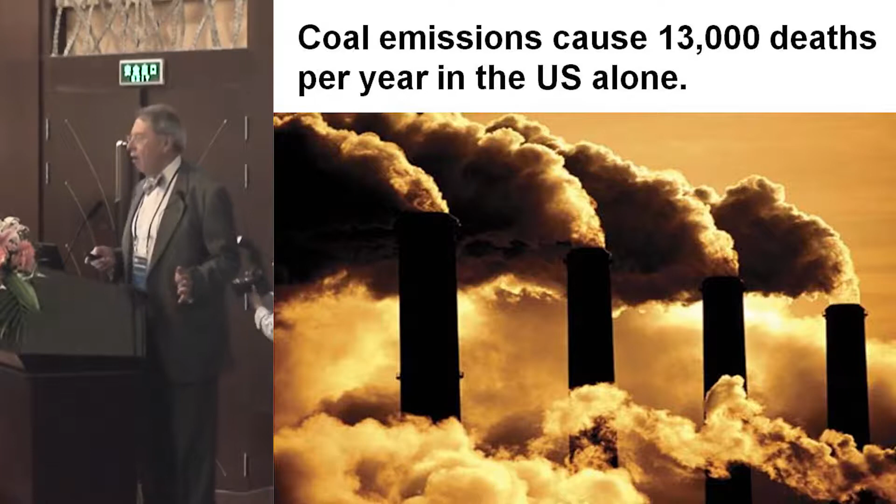In the long run, people always do what's in their own economic self-interest. First, let's start with coal. The US EPA says coal causes 13,000 deaths a year from respiratory disease caused by particulate inhalation of particles about 2.5 microns or less. That's in the US alone. In China, over 100,000. The UN estimates that worldwide, almost 1 million people die from coal particulate emissions.

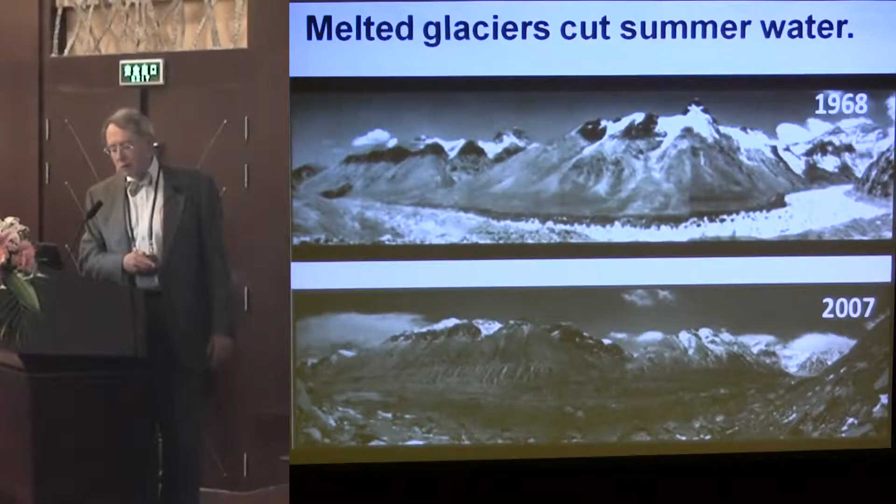One of the problems with global warming that I find the worst is the lack of food and water caused by the melting of glaciers. Glaciers normally retain water in winter and release it in summer, but the rivers fed by the Rongbuk Glacier are now becoming less able to provide water during the summer. Without water, growing food is next to impossible.

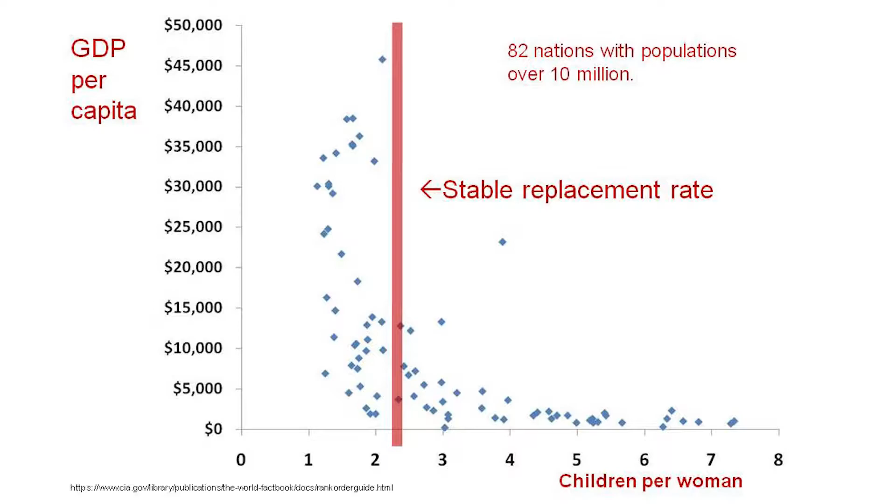Population scientists say about 2.3 children per woman leads to a stable population. If we draw that on the graph and look at it, it's the wealthier nations that have a stable or reducing population. The United States birth rate is about equal to that which would cause no growth. US population growth is principally by immigration.

Prosperity depends strongly on energy. Again, using CIA data, annual kilowatt hours per capita: the US is off the charts at about 12,000 per year. That's an average energy consumption rate for electricity in the US of almost 1,500 watts on average. Places in Africa have electric consumption of less than 100 watts per capita. It's pretty clear that somewhere around 2,000 kilowatt hours a year is the break-even point for achieving prosperity using electric power.

Now, electric power is not the only way to achieve prosperity. You need education, property rights, rule of law, medicine, and so on. But electric power is critical to prosperity because it's the type of energy necessary for cooling, for heating, for water purification, for sewage processing, for medicine, for communications, for industry, for transportation. All those things depend upon electric power.

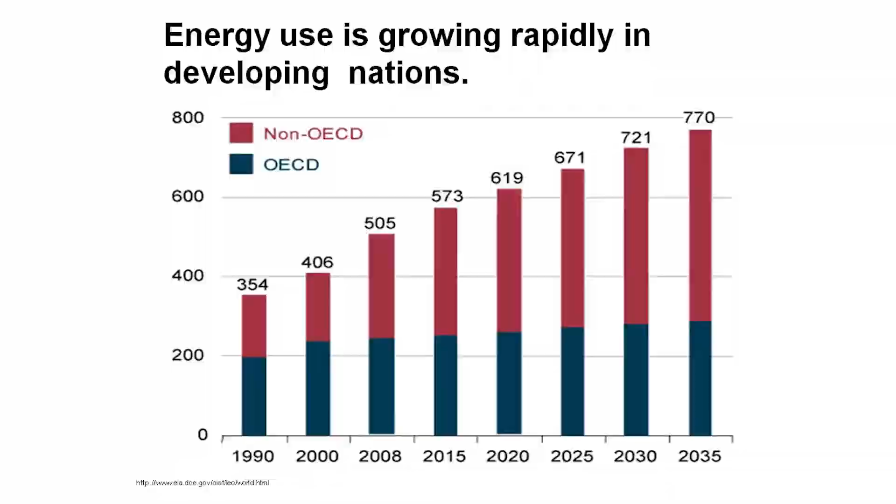All the developing nations know this. They wish to increase their energy use. And so you see, the non-OECD nations are projected to have the most growth in energy over the next few decades. How are they going to do it? They're going to do it by burning coal, because they don't have money to build $5 billion nuclear power plants. They will use the cheapest energy source available to them because they desperately need that electric power.

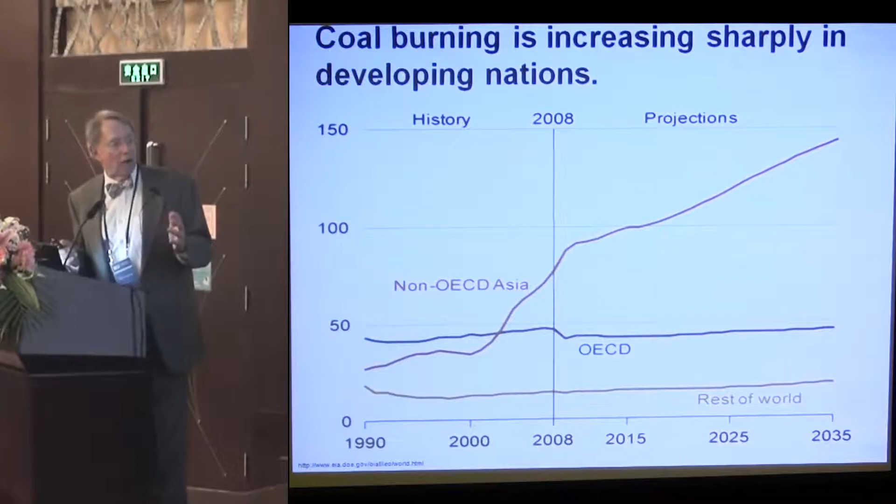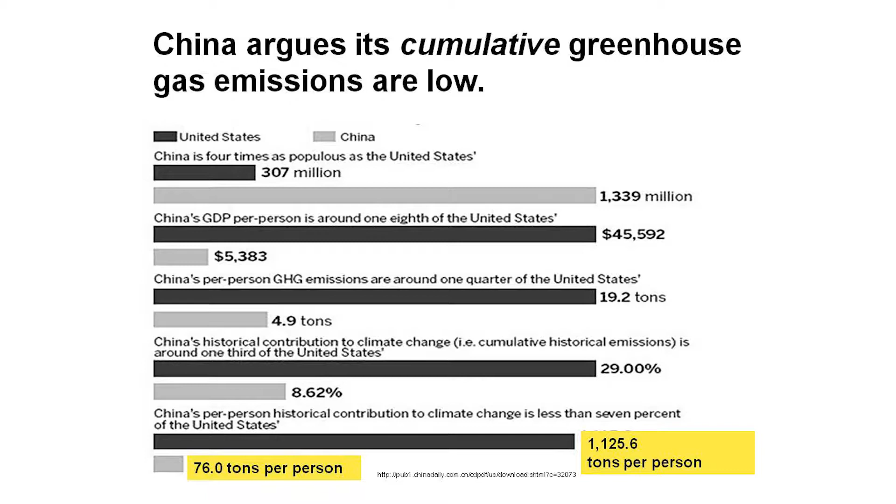The China Daily in 2010 published this article. Technology is required to solve this problem. They also argue against carbon taxes. Here's that same chart magnified. They point out that cumulatively in the US we are responsible for about 1,000 tons of CO2 per person, whereas in China it's less than 10% of that. The developing nations argue that the West gained its prosperity by cheap energy, by burning coal and emitting CO2, so why should developing nations be denied that right? It's not fair. I'm not trying to make that argument, I'm trying to point out that it's impossible to reach agreement on such a contention.

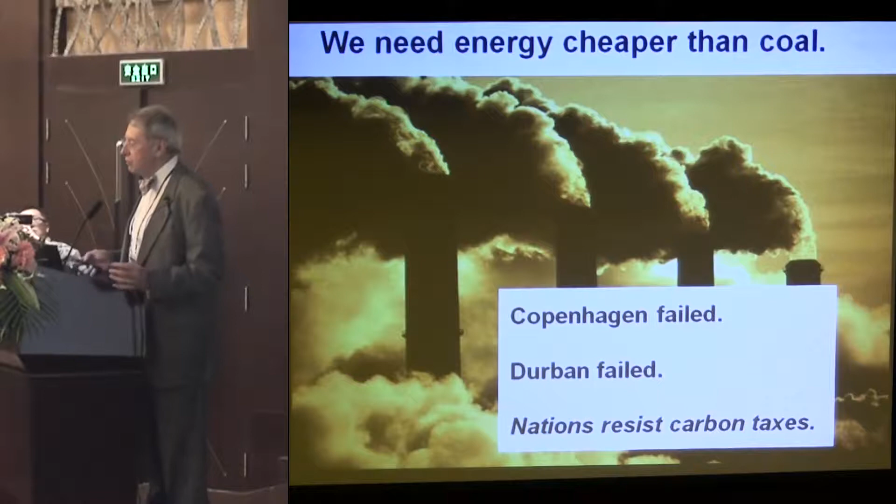So we tried anyhow. We had conferences in Kyoto, in Copenhagen, in Durban. Do you know 30,000 people went to the conference in Durban to negotiate a climate treaty? Well, how can 30,000 people agree on anything? How can 7 billion people in 250 nations in the world agree to impose taxes on carbon that is against their individual economic self-interests on behalf of the whole world's stability? It's not going to happen.

So let's look at the cost of electricity from coal and other sources, because there's also a green movement that wants to replace coal. Here's the cost of coal: about $2.8 per watt of generation capacity is the capital cost. In this talk, I use a single model throughout: capital cost recovery at an 8% cost of capital over 40 years, operating a plant 90% of the time, giving 2.8 cents per kilowatt hour. So it's easy to remember, $2.8, 2.8 cents.

So that's the capital cost. The fuel cost for coal is about $45 a ton delivered to the plant, which adds about 1.8 cents. So in this model, the cost of coal for a typical US plant is about 5.6 cents per kilowatt hour.

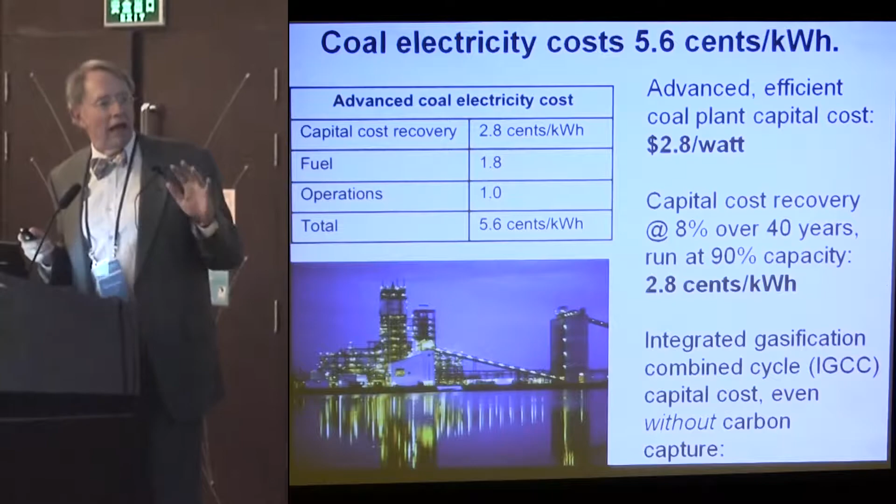Natural gas is another interesting energy source. First, if you were going to do the best job you could, you would use a combined cycle gas turbine, which has 60% efficiency converting thermal power to electrical power. Buying such a thing costs about $1 per watt for capital costs. I used fuel costs of $5 per million BTU to come up with a fuel cost per kilowatt hour of 2.8 cents. Our operations costs are standard in this model, and that comes to about 4.8 cents per kilowatt hour.

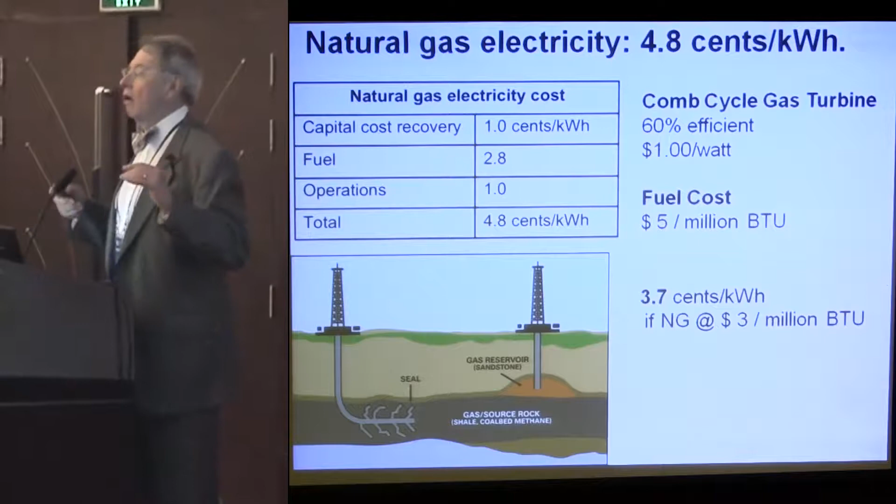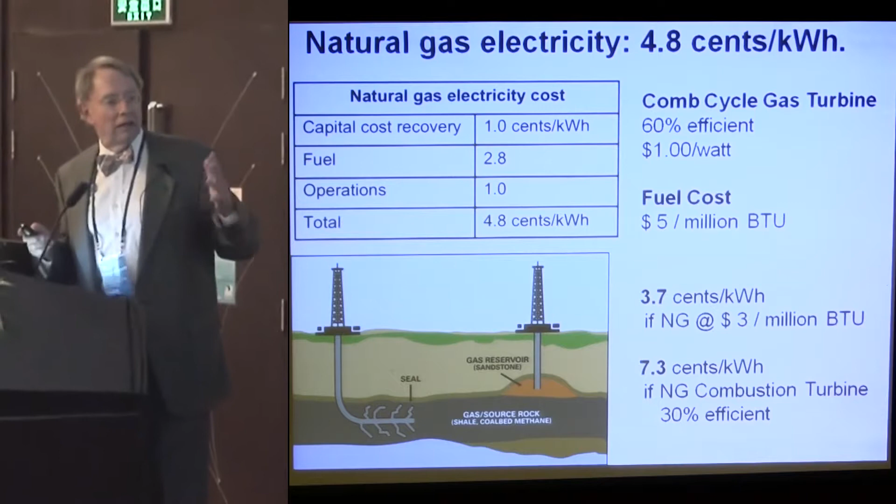Now, on the other hand, the cost of gas right today is a little lower than that, and if that were to persist forever, we could have a low cost of power from natural gas of only 3.7 cents. But actually, we don't use combined cycle gas turbines very much—we mostly use natural gas combustion turbines, and that would mean it would be about 7 cents. So those are the bogeys we want to deal with.

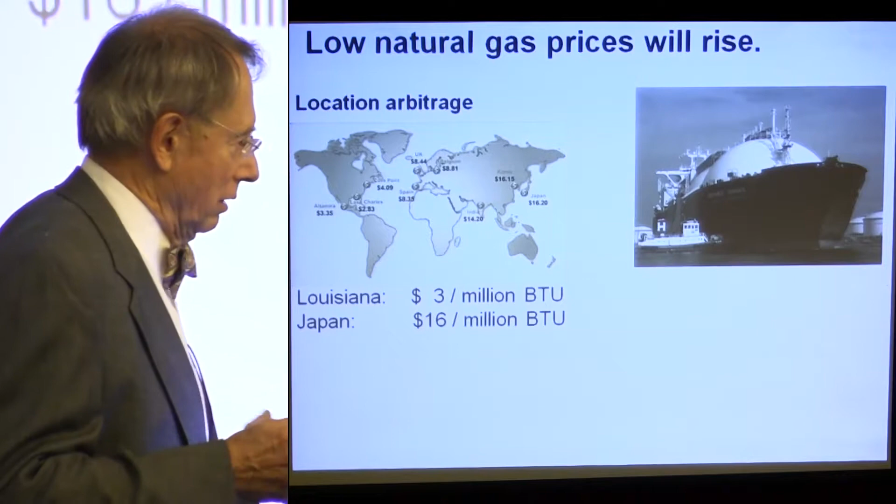Here are the reasons natural gas prices will rise. Here are the prices of natural gas worldwide: in Louisiana, about $3; in Japan, about $16. Japan is importing liquefied natural gas more and more because they've shut their nuclear power plants down, and it has changed their balance of trade from a positive number to a negative one. So that really can't persist for long periods of time.

Substitution: just look at the price per BTU of thermal energy from oil versus natural gas. There will be substitution, more emphasis on flex fuel vehicles. That's going to drive up demand for natural gas and raise the price. Even the Energy Information Administration of the United States says it's going to go up. That's why I used $5 in my model.

Let's look at wind. Wind is integrally tied with natural gas. This number is pretty high, isn't it? Well, the reason is that it costs a lot of money to build these wind farms. It's very hard to find the right costs.

The costs are generally hidden from the public, so the public doesn't know about the subsidies. But here are two examples: Deepwater Wind off the coast of Rhode Island, and Cape Wind off the coast of Cape Cod, Massachusetts.

These are the costs per watt. But those capital investments can only be recovered in the 30% of the time the wind is actually blowing, so the capital cost per kilowatt hour generated is much higher—it's 17.4 cents. The fuel cost is nicely zero. The ops cost, I made the same for all of this model.

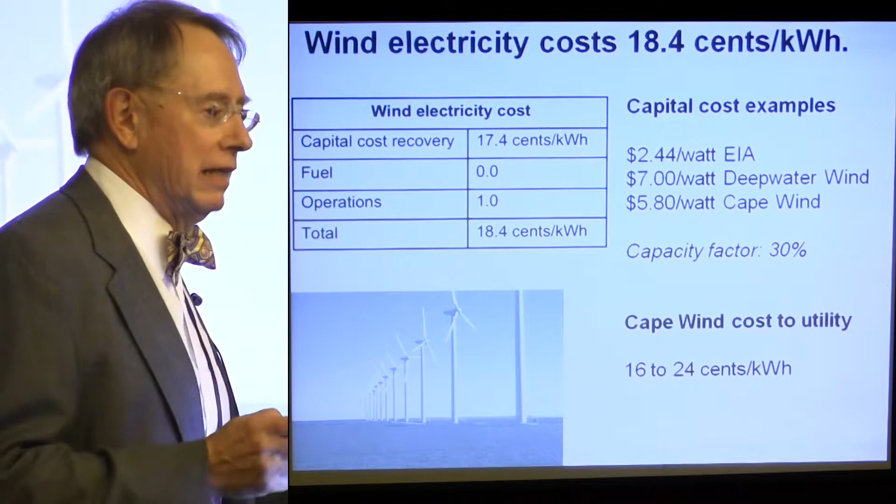I got 18.4 cents. I checked that against the real costs, and Cape Wind has negotiated a deal with the state of Massachusetts in which they will sell power at that price. So I say that model is about right—that's how much it really does cost, but they're going to hide that number from the ratepayers.

Now, wind turbines increase CO2 emissions. How can you say such a thing? Let me explain. First, if you had hydropower available, you could use it to back up wind turbines during the lulls. So if the wind turbine is running 30% of the time, the hydro could run 70% of the time. In most situations there isn't enough water to run hydro constantly, so you only open the floodgates when demand is high. If you had wind turbines coupled with hydro, you could in fact just save water, not emit more CO2. That's a good pairing—it's the kind done in Denmark with the hydro facilities in Scandinavia.

But I want to go back to the two kinds of natural gas turbines. The most common is a combustion turbine, much like a jet engine. It's only 29% efficient in converting thermal energy to electrical power, but it starts up quickly—in 10 minutes or under, approximately. So as the wind lulls, the natural gas combustion turbine fills in the gaps.

The most efficient gas turbine is combined cycle, with 60% efficiency—twice as good—but it takes a long time to start up, almost an hour, because not only does it burn gas, it also has to run the boiler with the output of the turbines. So it's a little more expensive, slow to start up, but a lot more efficient when running.

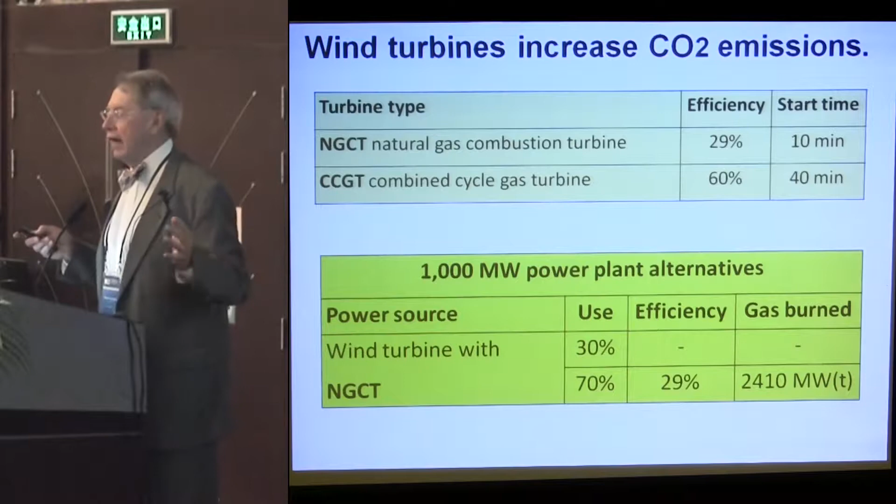So let's suppose we were planning the energy economy of a nation, and we have a choice to make. One choice is, for a 1,000 megawatt power plant, use wind turbines with natural gas backup. If we do that, then 30% of the time we're not using any fuel, but 70% of the time we're using fuel at a rate of 2,400 megawatts thermal.

Suppose instead I had only combined cycle gas turbines. Well, I'd be running 100% of the time at 60% efficiency, using less fuel. So I deplete my resource less rapidly, and I emit less CO2 by not having installed any windmills to begin with.

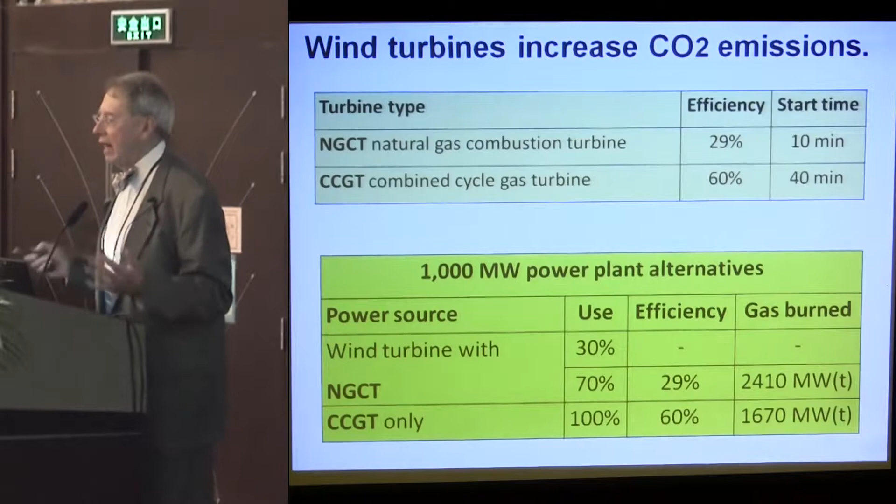The public isn't aware of them because they're hidden, averaged out over the whole bill. But what's important to society is not who pays—whether it's the taxpayer, the ratepayer, or an unlucky investor like the government of Spain. What matters to society is the true cost. So let's look at those, and that's why we're doing this.

Biomass. The cheapest way to use biomass is to burn it. We can talk about ethanol-powered engines and so on, but there's a lot of energy lost converting biomass to ethanol. So let's just burn it—that'll give us the best answer possible.

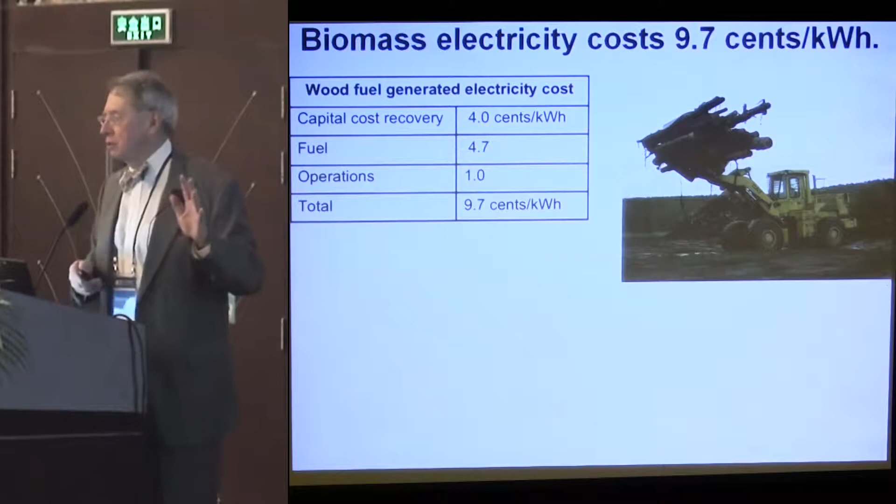Capital costs—I looked up a few plants. I used $4 per watt to build a wood chip burning power plant, and I actually visited one. Capital cost recovery comes to 4 cents per kilowatt hour. For fuel, you have to drive trucks around to the woods to cut lumber, haul it back to the plant, cut it into chips, and burn it.

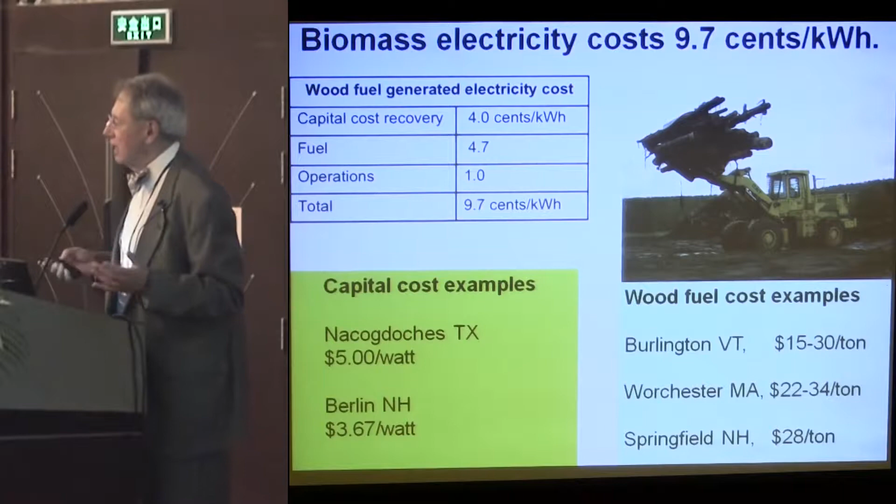And here are the typical costs. I convert those costs in tons to BTUs times the efficiency of the plant, about 4.7 cents per kilowatt hour. Now, you might say, how do wood plants actually make money if they're selling it so expensively? Well, there are all kinds of rules in the United States, at least, about getting green energy credits that

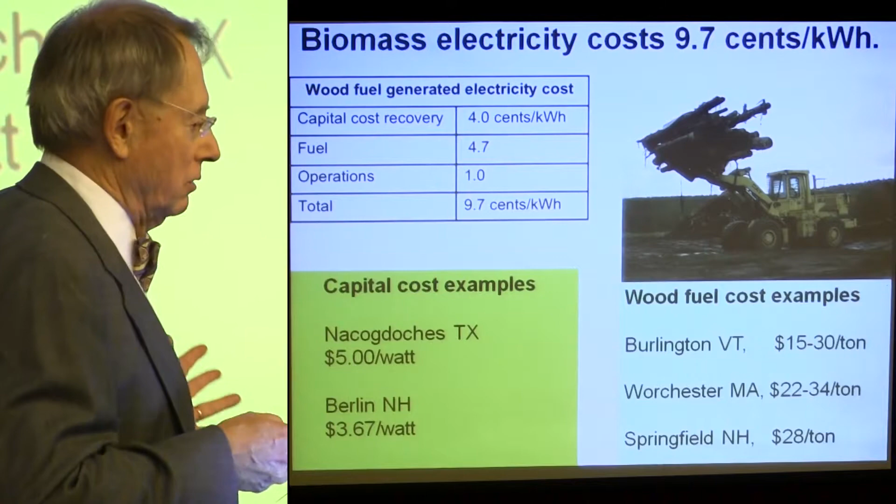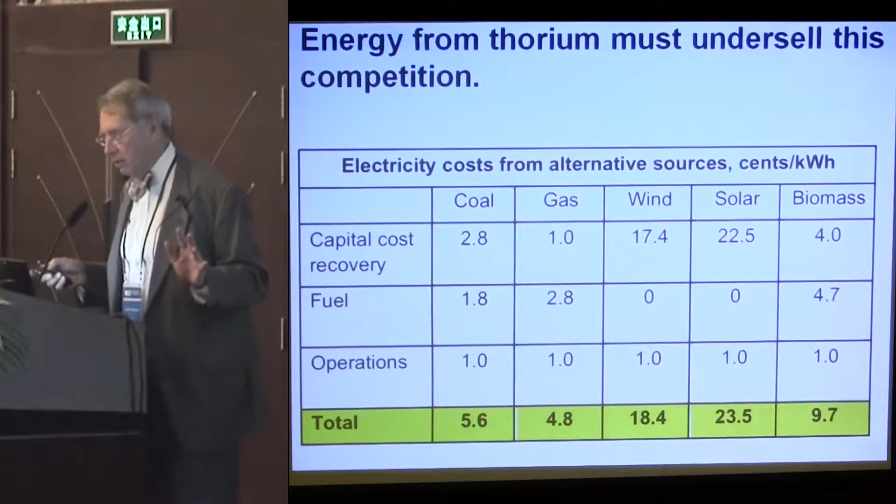are marketed, renewable energy credits, to make it possible to do that. So, if we want to save the world by underselling coal, here are the numbers we have to beat. And we might have to go as low as 4.8 cents for gas if, in fact, the gas prices never do rise. That's the bogey. That's our objective. Undersell those numbers.

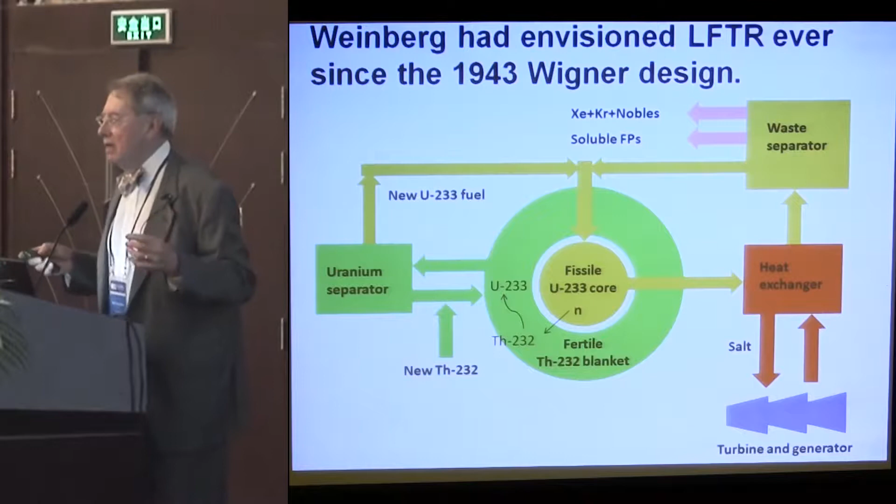Can we do it? Everyone in this room probably knows already how one of these liquid fluoride thorium reactors works. In this example, it's a two-fluid reactor that is fed simply by thorium, and it's sort of idealized, and it continuously processes the nobles, which are relatively easy to get out, and the fission products, which are harder to get out. Weinberg thought that the world's future depended upon such an inexpensive energy source.

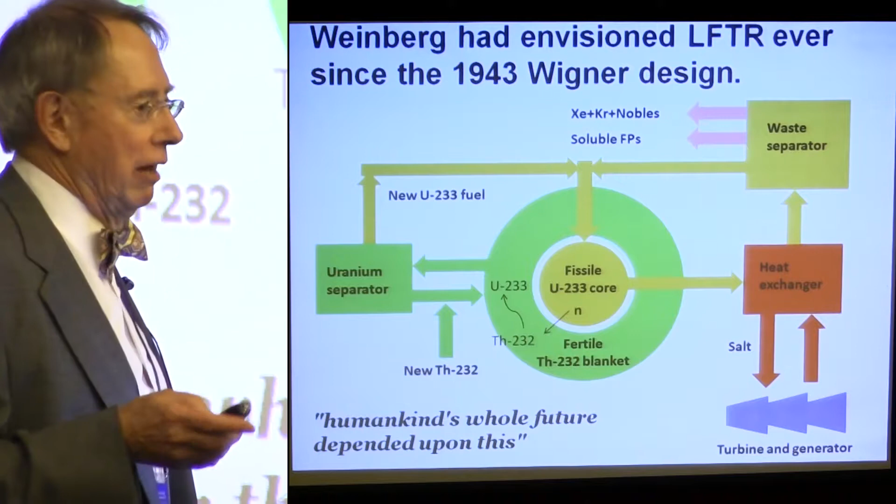Weinberg himself wrote about global warming from CO2. There's an intermediate step that could be equally effective, a lot less expensive, the denatured molten salt reactor that actually does not bother to process the dissolved fission product fluorides, but simply leaves them in the salt for 20 or 30 years until eventually they have to be reprocessed or perhaps just dumped and started all over again. In this example, it's fed with U-235, probably diluted in U-238 at a 20% level, and that works.

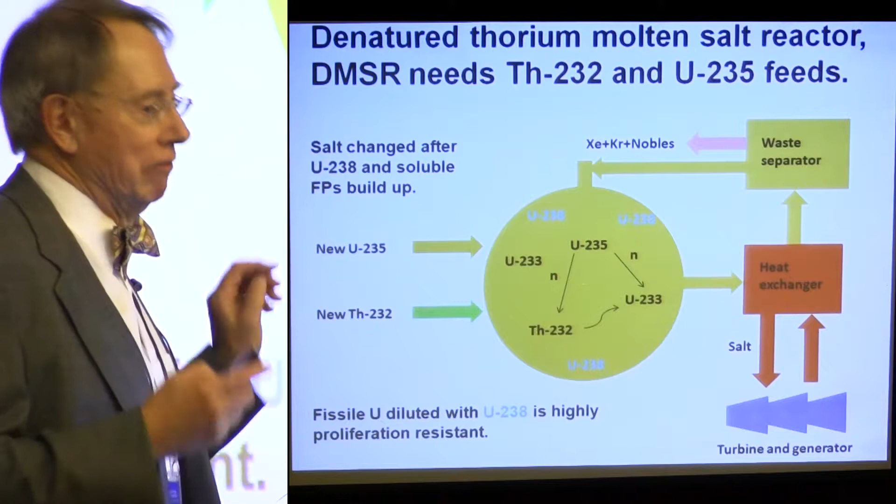Oak Ridge built one of these without the U-238. They ran it on U-235. They ran it on U-233. The advantage of U-238 is that this kind of reactor is probably the most proliferation-resistant reactor that you could scheme up.

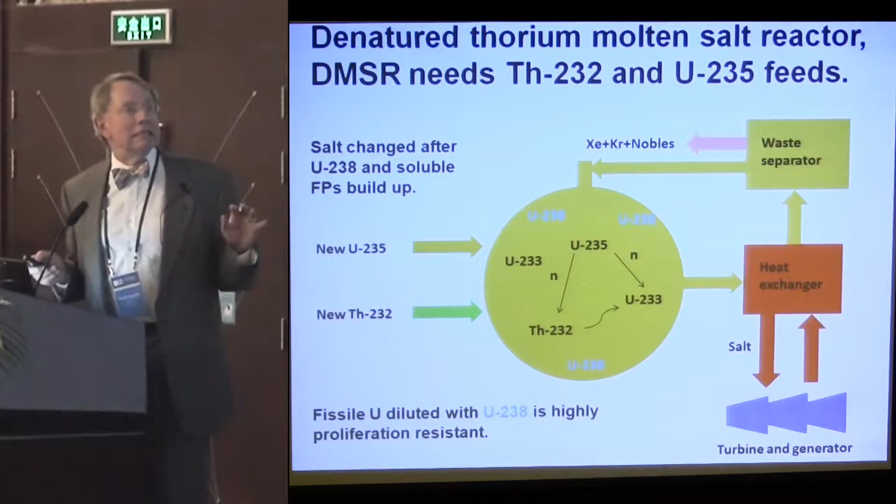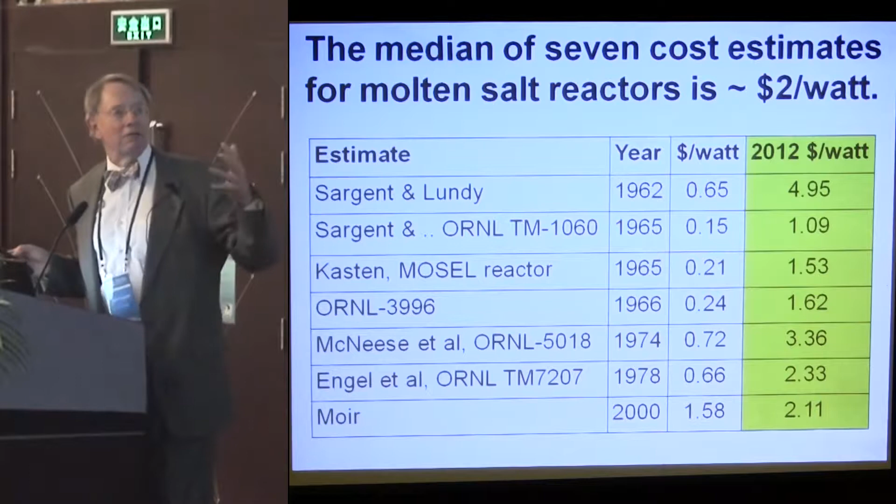Well, can thorium energy be cheaper than coal? That's what I want you to learn. The answer is, here are 7 proposals over the years to build molten salt reactors. And you can see $2 is a reasonable number for a target. These are real proposed numbers, inflated to current dollars.

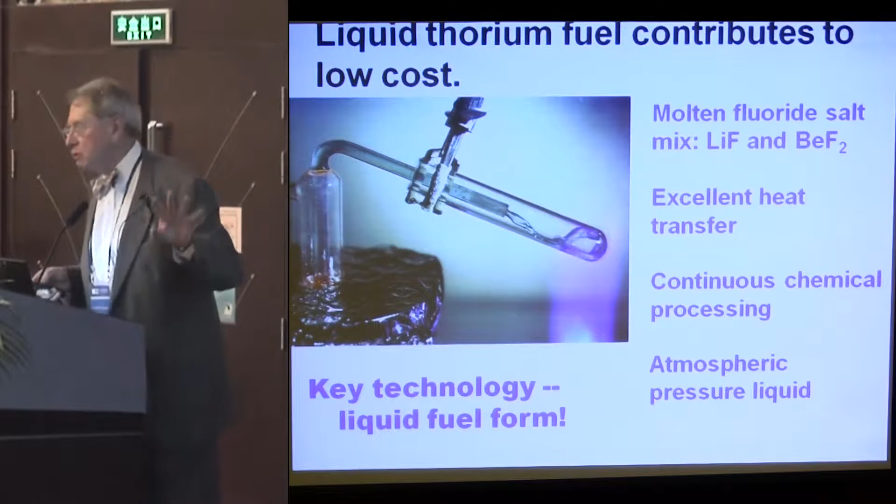The reason this technology is potentially inexpensive isn't the thorium so much, it's the liquid fuel form, because it has excellent heat transfer, allows continuous processing for fuel additions and fission product removals. It's an atmospheric pressure liquid, so containment is much simpler. And it's a room temperature solid, so if there's a problem, the particulates or the fission products and so on don't necessarily escape so easily into the environment.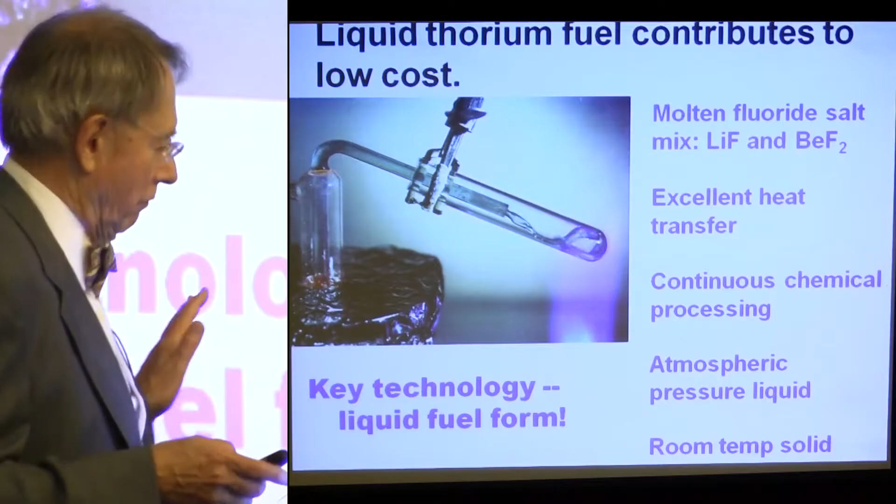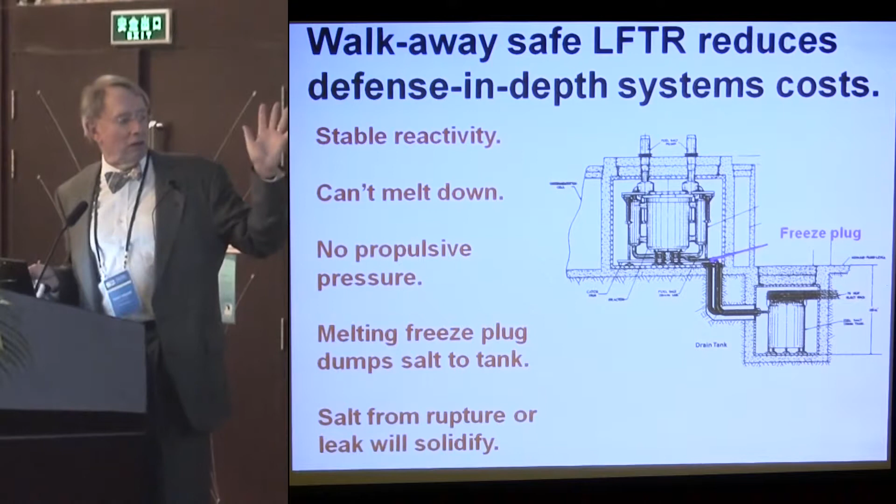The safety systems also contribute to the low cost. The reactivity is stable, makes it simple to control. It's a thermal reactor, unlike a fast reactor. There's no meltdown concept. It's as hot as it's going to get. There's no propulsive pressure to push reactive materials into the environment, and so on. There's no large containment dome. That saves money, saves mass.

Let's look at the waste product for a minute. Here's the process for converting Th-232 to U-233 by neutron absorption in a nuclear power plant, in particular a liquid fluoride thorium reactor. And if you were to let that go, eventually, by more and more neutron absorptions, you could actually get up to plutonium-239 and perhaps the higher level actinides. But compared to a normal light water reactor, it takes 6 more neutron absorptions, so it's much, much less probable to generate any of that long-lived, high-level transuranic waste.

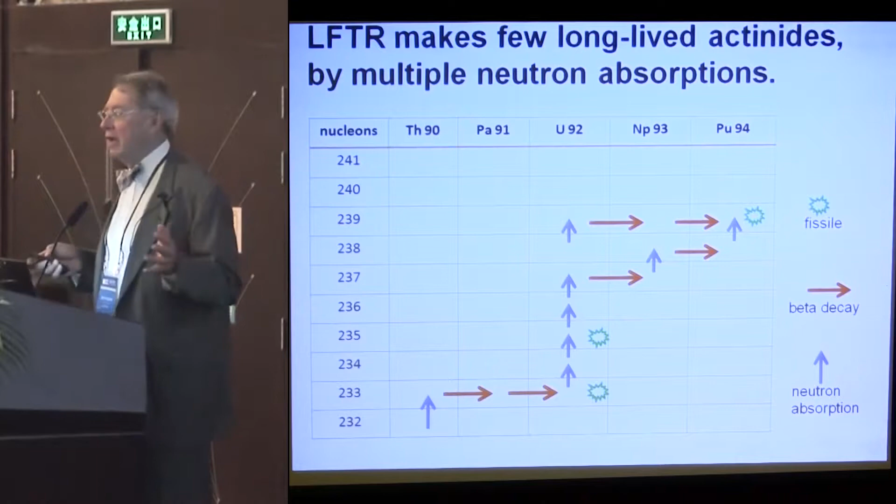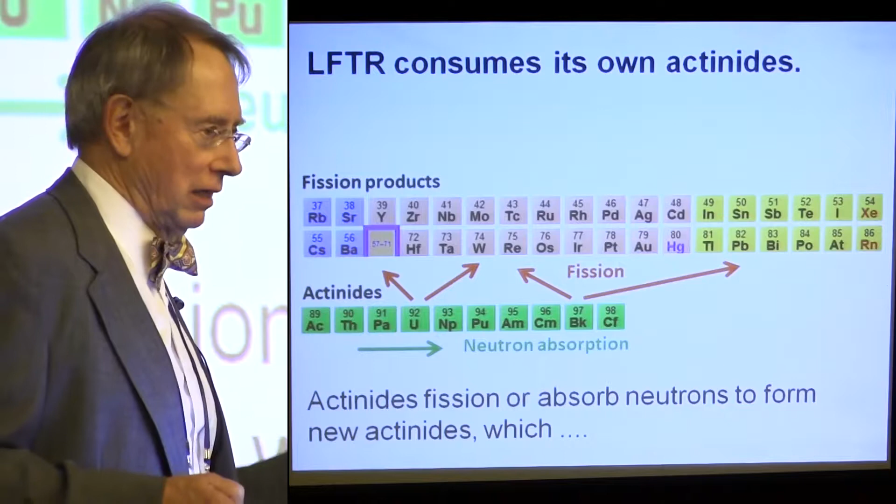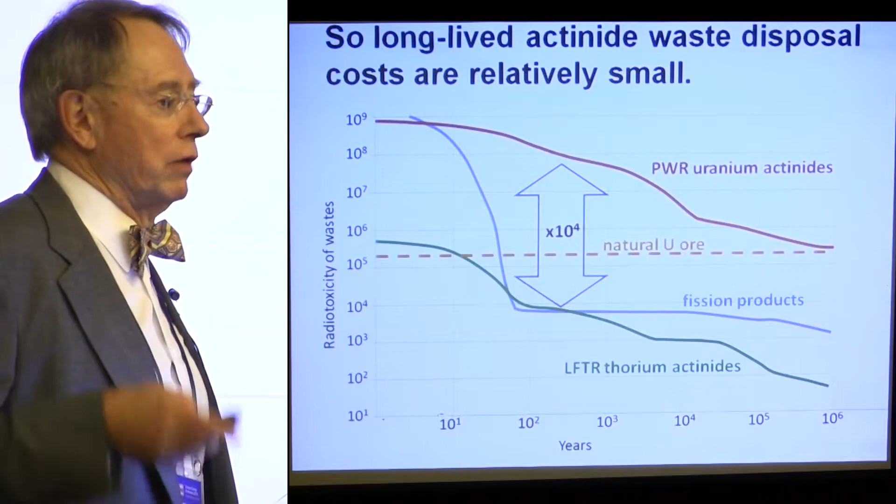On the other hand, if you had U-238 in the mix, okay, 1 neutron absorption, and there you go. So that's the difference. These kinds of reactors, if you leave the actinides in solution, can slowly get rid of them by absorption and potential fission. It's not as good as a fast reactor, but such a reactor can consume much of its own actinides that are created. And the end result is, although the fission product waste for all kinds of reactors is about the same, and it has to be dealt with very carefully for 200 or 300 years, the long-lived actinide waste, at least from a liquid fluoride thorium reactor, is about 10,000 times less.

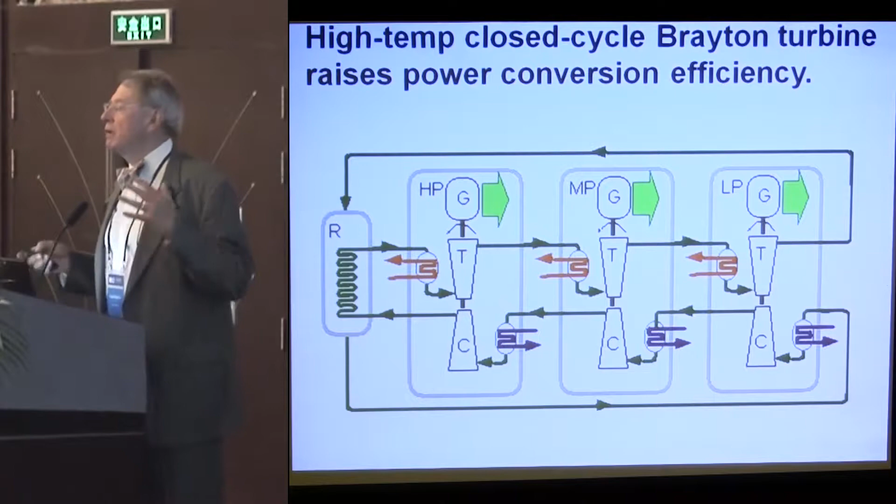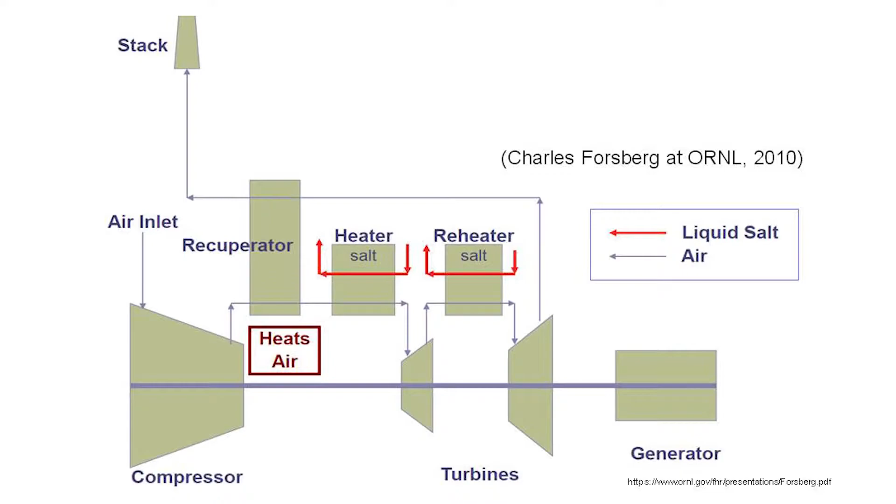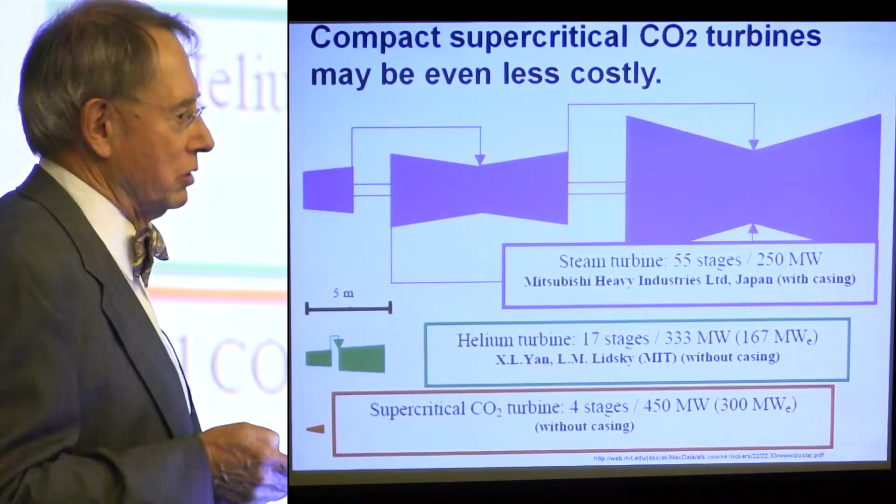And you can see on the diagram, the little red turbine on the bottom is meant to represent the expected mass of the supercritical CO2 cycle. So that's another reason why this can be less expensive. And of course, thorium fuel itself is pretty inexpensive.

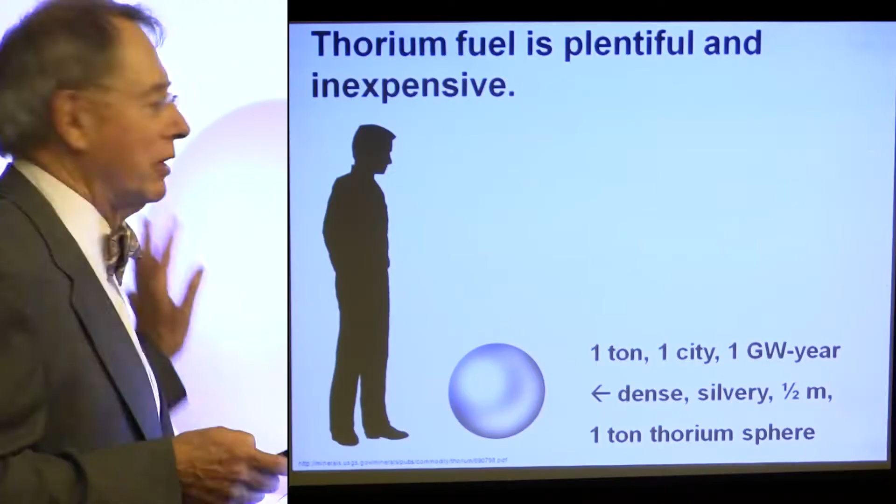Here's a 1-ton ball, about the right size of it. You could put it on your pickup truck. You could run the city of Boston for about a year. You could run the entire US on 500 tons. The government has 1,500 tons in storage, just sitting around in the desert. There are millions of tons available worldwide, and there's enough thorium in every country that each country can be guaranteed some level of energy security. They can't be blackmailed by saying we won't give you the fuel.

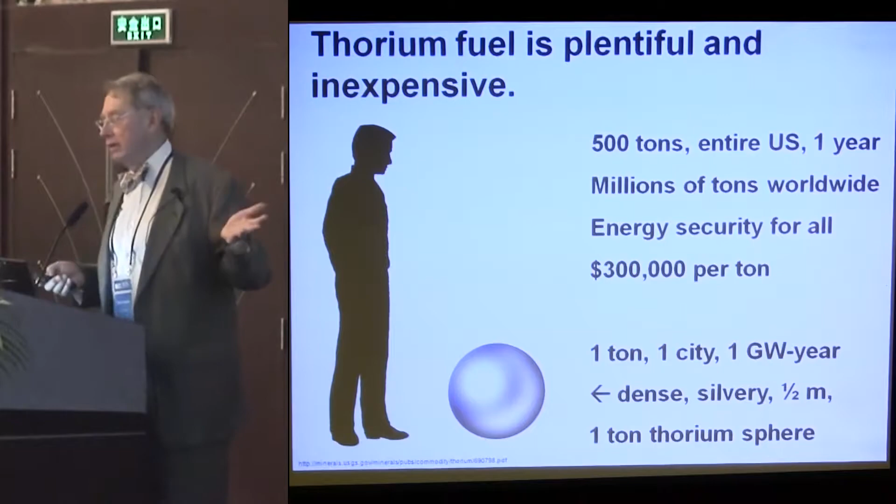It's pretty inexpensive. Let's look for a minute about the idea of mass production of small modular reactors. My model here is Boeing aircraft. They can produce a $200 million unit every day. Aircraft manufacturers have the same responsibilities as nuclear power manufacturers. They worry about corrosion, material fatigue, quality control, CAD, CAM, computer-aided manufacturing, all those kinds of things. Why can't we produce nuclear reactors the same way?

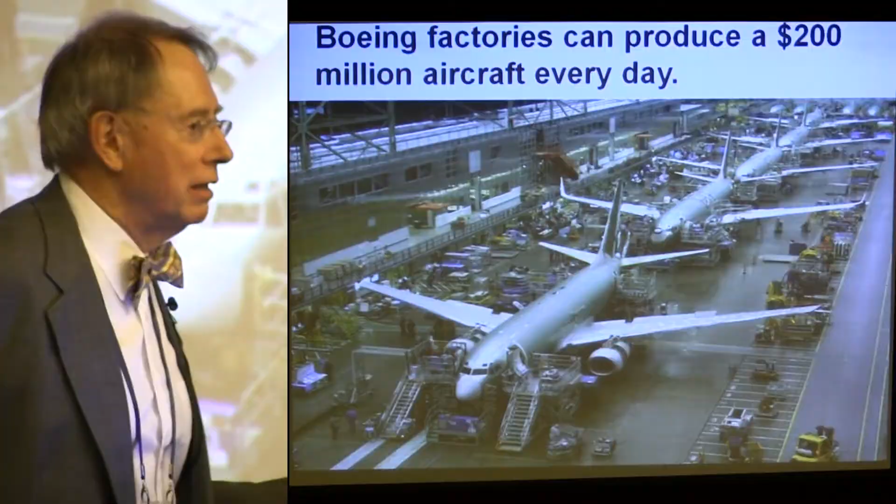Then we get the benefit of what's called the learning curve in manufacturing. This is not a theorem, but an observation that every time you double the number of units produced, the average cost drops by something called the learning ratio. In the early aircraft industry, it was about 20%. In the IT industry today, it's about 50%. The University of Chicago postulated it would be about 10%, which is pretty conservative, for the nuclear power industry. That's if we do mass production of essentially the same units.

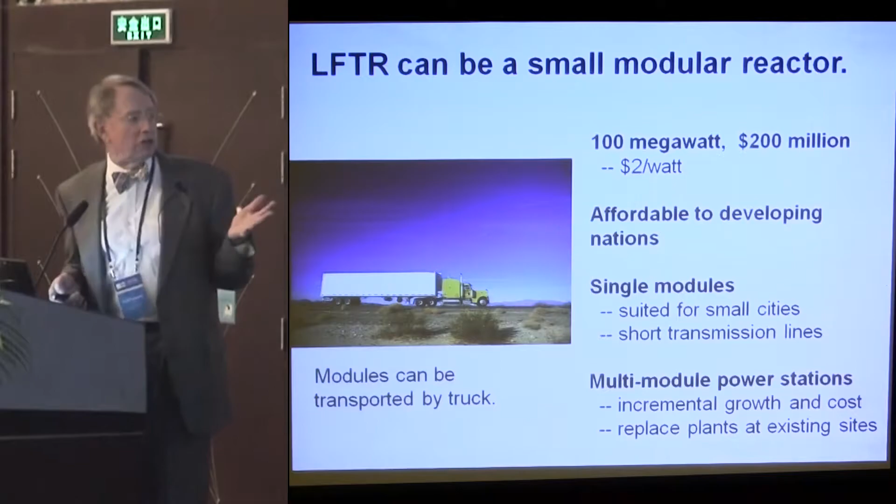So I say, learn to develop small modular reactors at about $2 a watt, about the cost of an airplane, $200 million. Make them affordable to developing nations that can't put in a $5 billion reactor. We can use small ones near cities. We can gang them together for bigger power stations. We can allow them to be truck transported. If we do all that at $2 a watt, the cost of fuel is nothing.

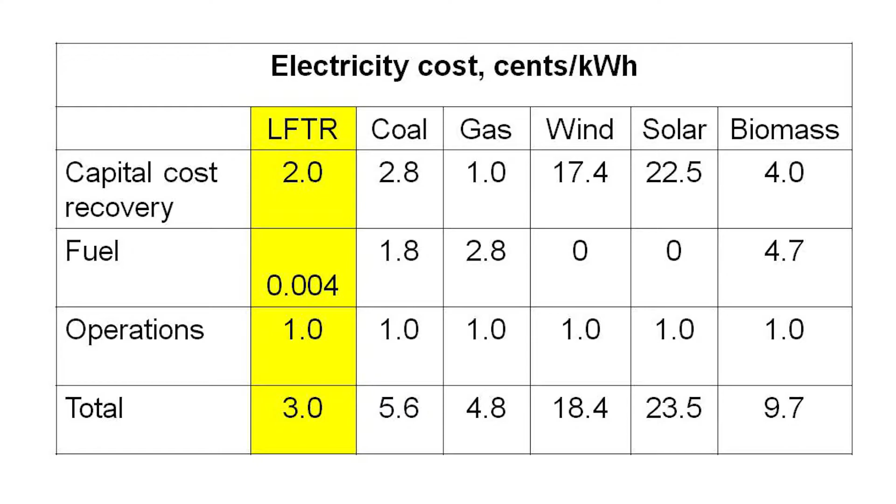I use the same number for operations as before. We can hit 3 cents per kilowatt hour, and we can undersell all the competitive technologies. If we do this, then we can create a new industry. I'm advocating about $1 billion investment in the development stage for R&D that becomes public domain, another perhaps $5 billion of industrial investment to develop the production capabilities, and then the process of producing and exporting one a day.

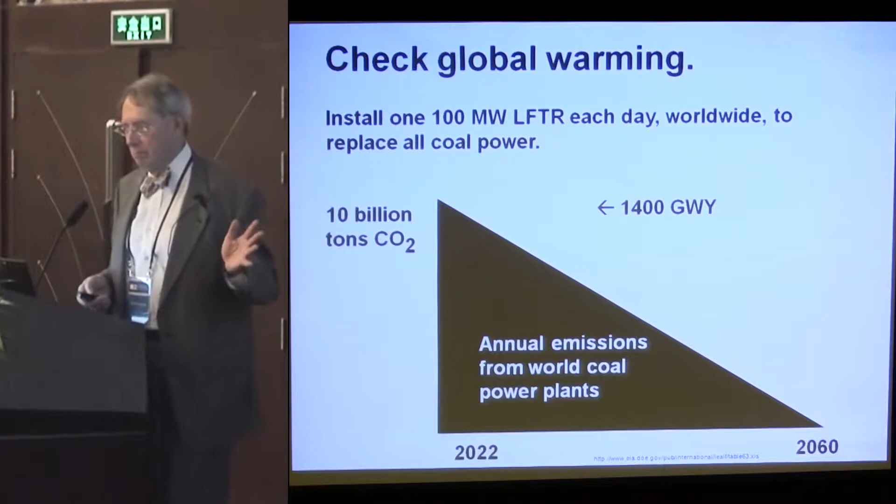What if we do that? What will happen to the CO2 emissions? We could eliminate in 38 years all the coal plant emissions, all of them. All you need to do is produce one a day.

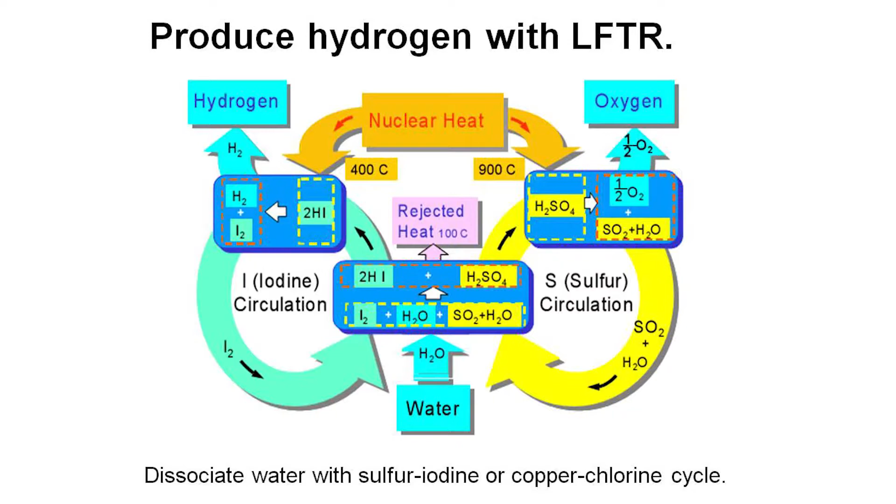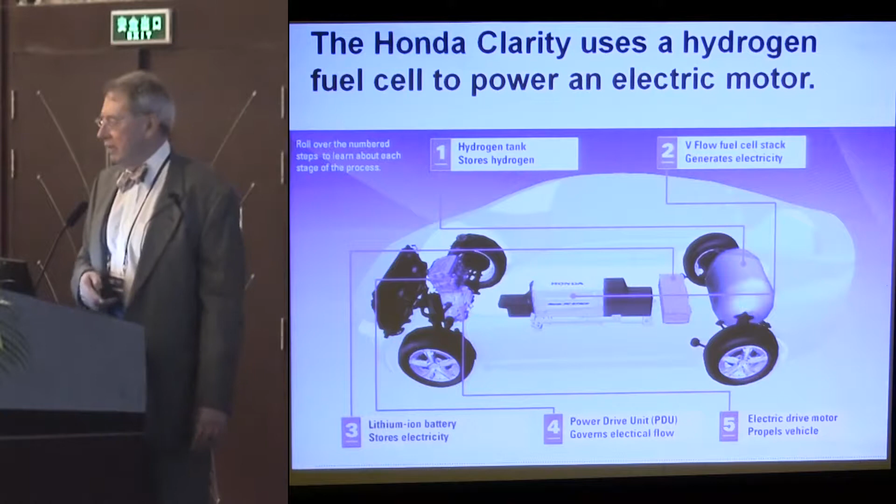Having solved that problem, what do we do about fuels for vehicles? With only 900 degree heat, we can get about 45% efficiency, conversion from thermal energy to chemical potential energy for burning hydrogen. There are actually hydrogen cars available. The Honda Clarity can be purchased in California today if you live near one of the dozen or so hydrogen fueling stations. So they do exist.

Ford Motor Company did an internal combustion engine with hydrogen. But hydrogen is not an easy thing to deal with. For one, you have to compress it or liquefy it in order to carry it on board a vehicle. And when you do that even, it's not nearly as energy dense as these other kinds of fuels: ammonia, methanol, which is a gasoline substitute, or dimethyl ether, which is a diesel substitute.

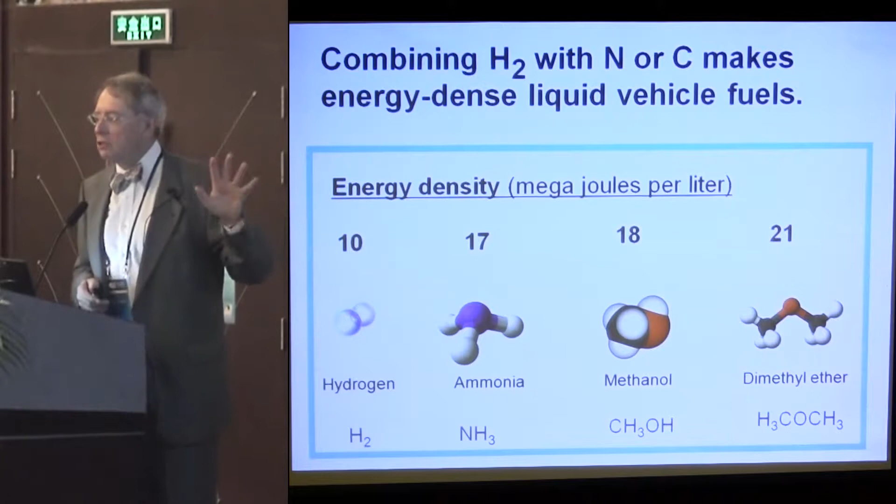So let's think about carrying that hydrogen with carbon and nitrogen. First, look at ammonia for a minute. More than 1% of the whole world's energy is used to make ammonia. It's used principally as a fertilizer. A third of the lives on Earth depend on food that's grown from ammonia produced this way. And it's produced now from natural gas.

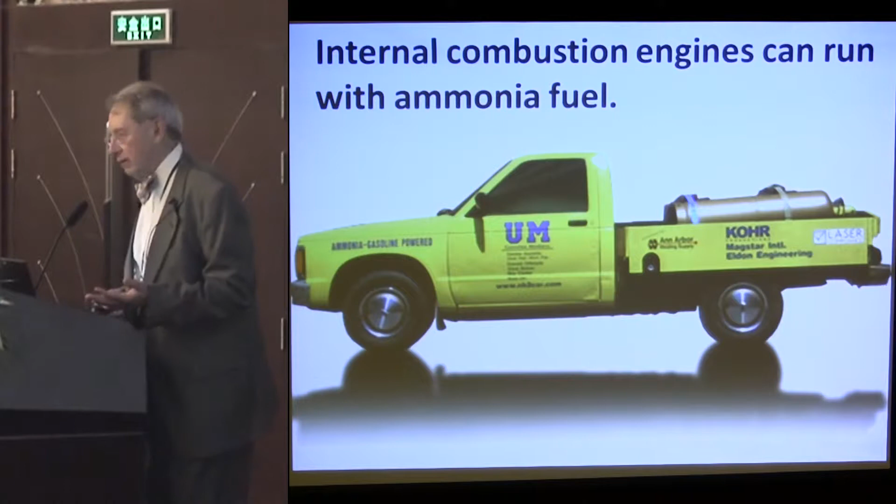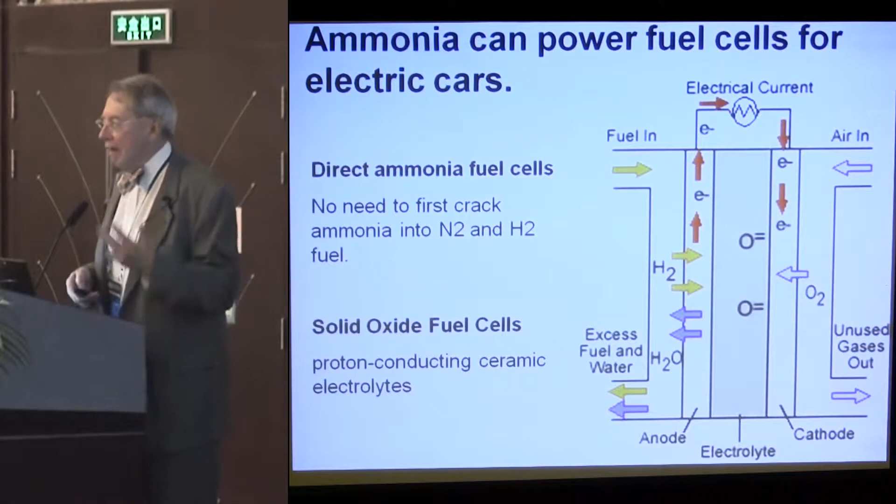But we can also use ammonia to fuel an internal combustion engine. This is a University of Michigan experiment. There's a guy in Canada who has a car that runs on this. It's certainly possible. You can even use ammonia to run fuel cells. These solid oxide fuel cells are sort of laboratory scale now. There's no industrial capability to do these kinds of things.

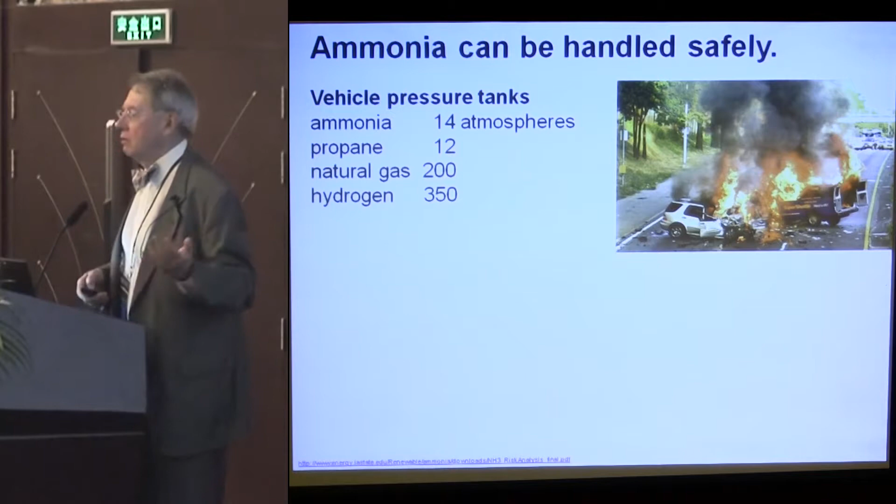And ammonia really can be handled safely. People say, oh, it's poisonous. Well, gasoline is explosive. You have to look at what all the risks are. Here's some examples: we'd have to pressurize it to about the level of a propane tank. Natural gas and hydrogen are pressurized to much higher levels. There is a spill danger, but you can smell it.

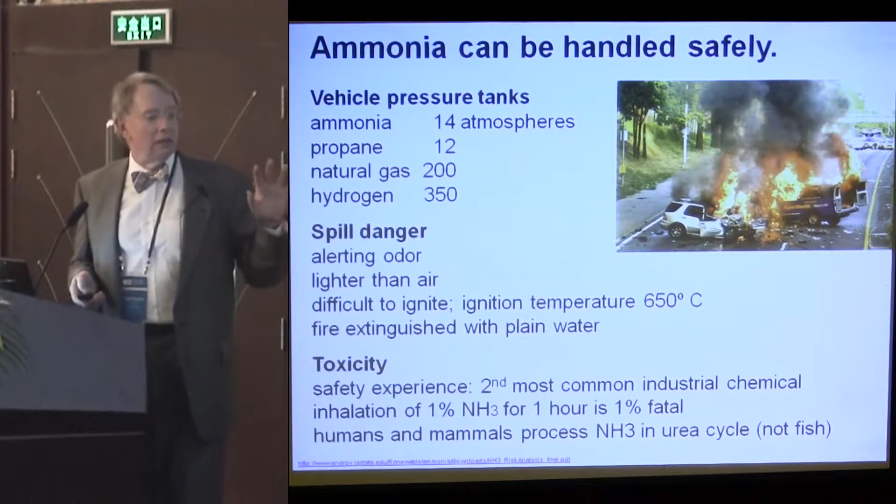It's difficult to ignite. It is toxic, so you don't want to breathe concentrations of it for a long period of time. There's no low-level toxicity risk because human and mammalian cycles naturally excrete urea. It is toxic to fish, so you have to be careful. There was a report done in the Midwest comparing the risks of ammonia and gasoline fuels, and although they're different, they're about the same.

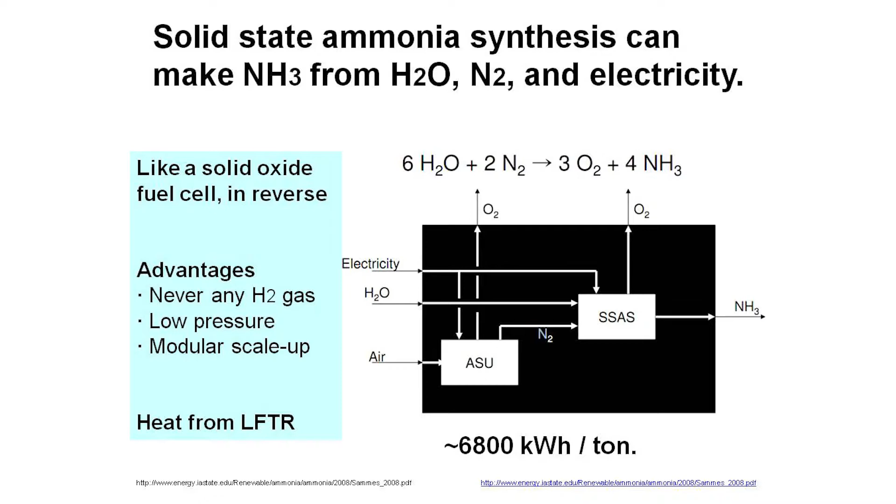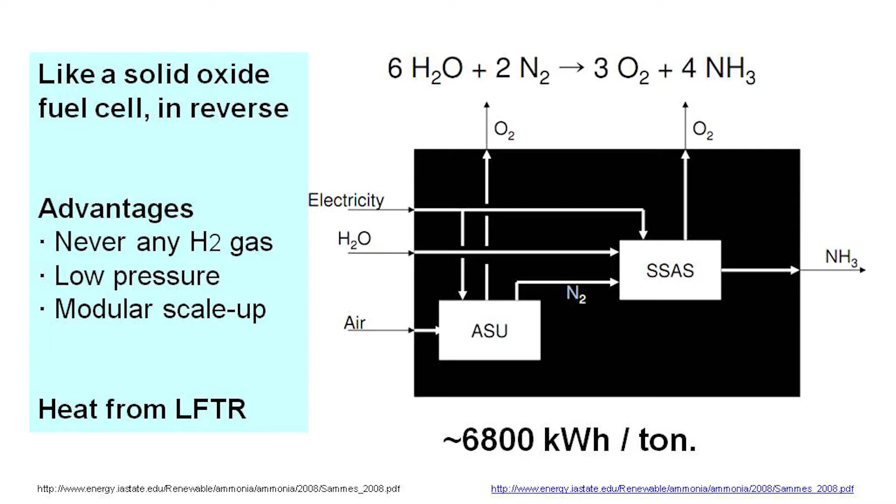Now, we can make ammonia from solid-state synthesis. It works kind of like a solid oxide fuel cell in reverse—again, lab scale. The NH3 Fuel Association did some papers on this. They estimated, and we adopted it, about 6,800 kilowatt hours of electric power are consumed per ton of ammonia produced by this process. It helped a little with extra heat. Suppose we did that at 6,800 kilowatt hours per ton.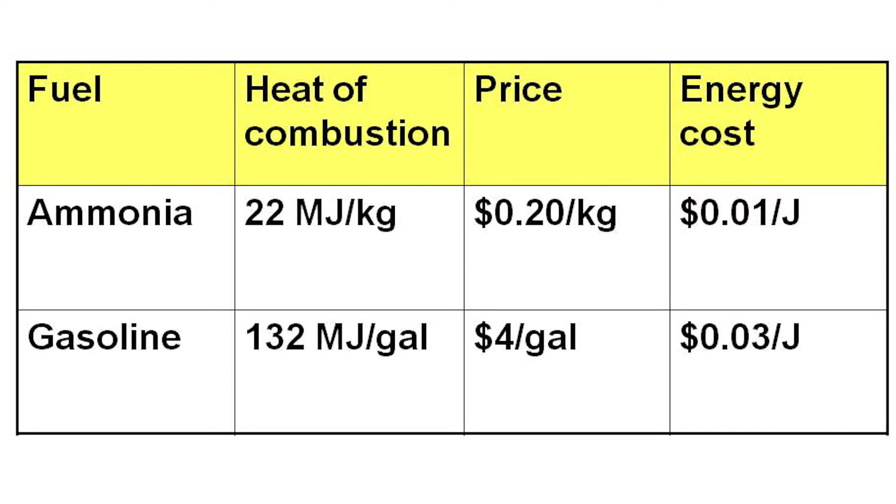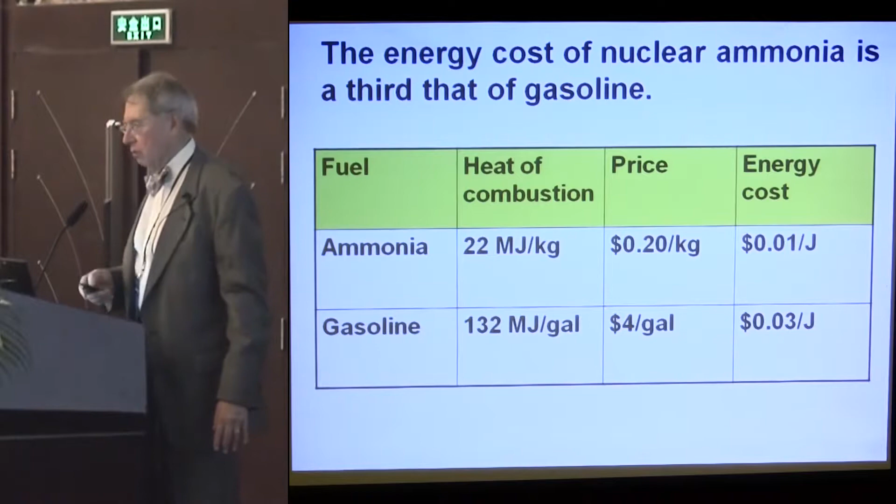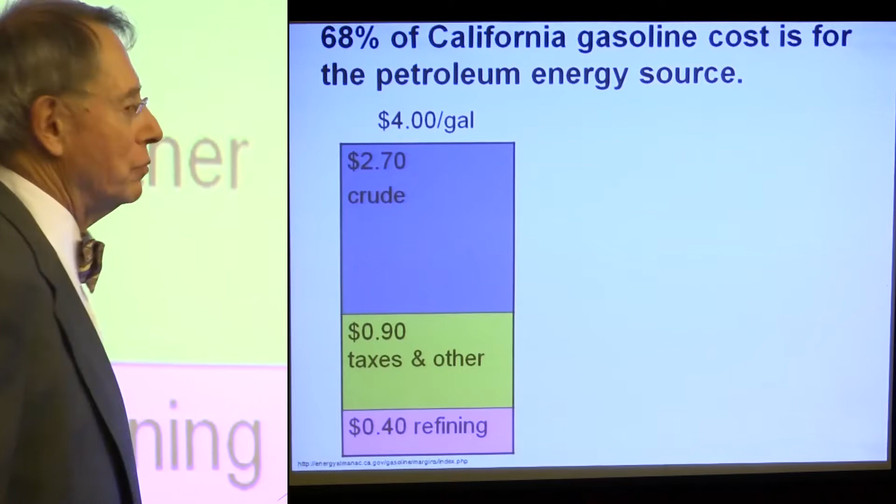Translate that into costs. That's about a penny a joule for energy from ammonia produced that way, whereas today's gasoline is about 3 cents per joule. Remember, a joule is a watt second. Then I looked at the California state analysis of their gasoline costs, and more than half of them are from the crude oil that goes into the gasoline. So I say, well, that's the energy content. The taxes, distribution, and refining—those are all going to be the same.

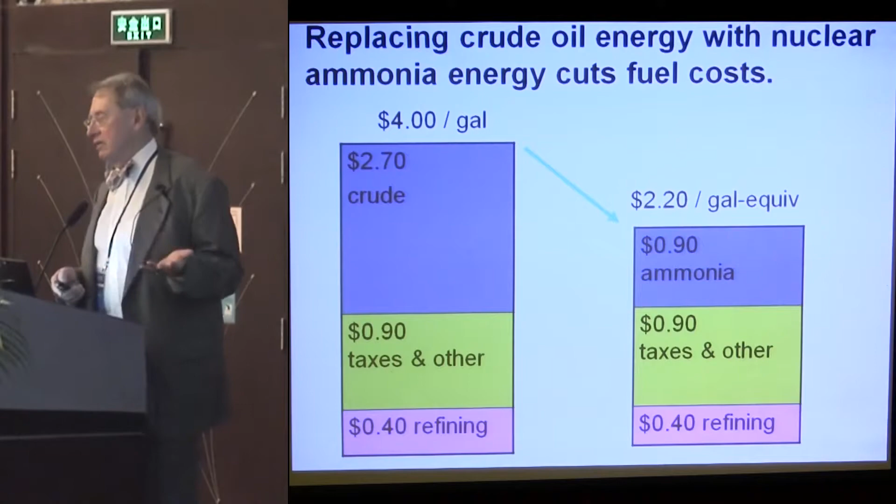Suppose we used ammonia. What might we get? Well, we might get a third of that cost, because it's only 1 cent instead of 3 per joule—we could reduce the cost of the gasoline equivalent. Now, I'm making the leap of faith that engineers can create refineries that can produce this kind of ammonia fuel as efficiently as do today's petroleum refineries.

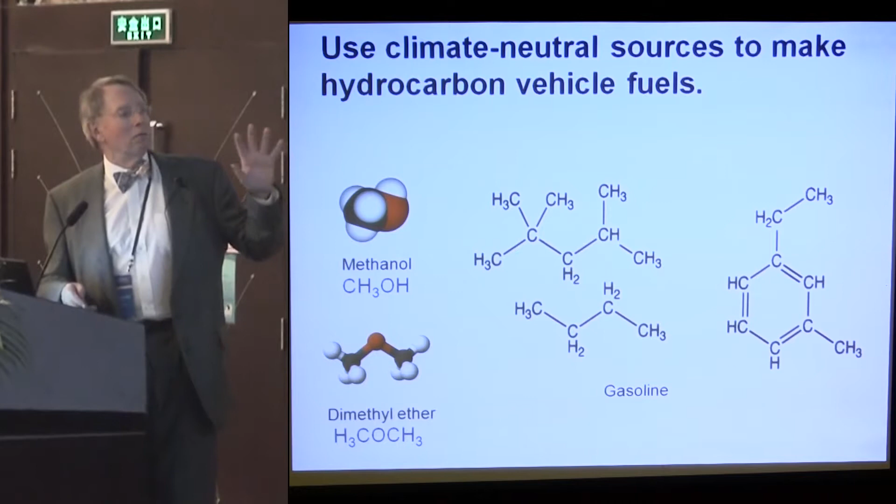Well, suppose you don't like the hydrogen and you don't like ammonia. We have to go back to carbon, but we don't want to take it out of the ground. What are the sources for carbon that do not pollute the atmosphere more? We'd like to make these kinds of chemicals.

One is the project called Green Freedom, which was done at Los Alamos—never built, just designed. The idea was to use a liquid in the cooling tower of a nuclear power plant that was saturated with sodium bicarbonate. When sodium bicarbonate is heated, it exudes CO2—that's how baking powder works in your kitchen. So you can capture that CO2.

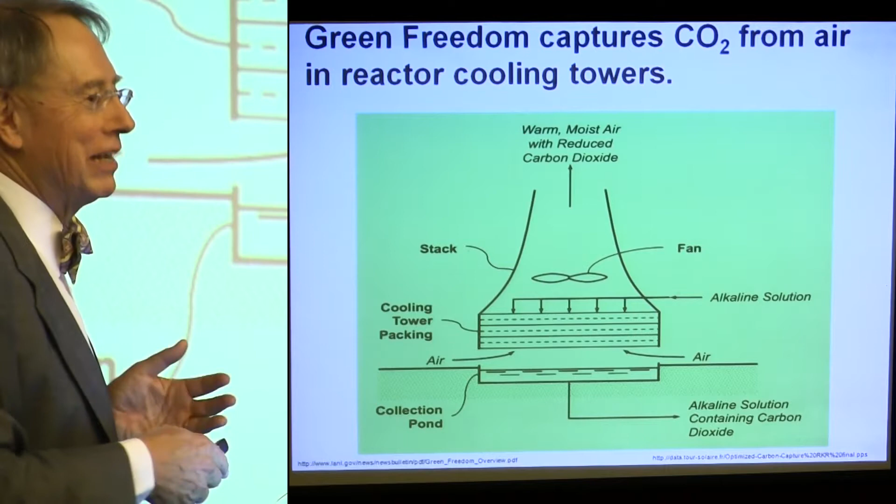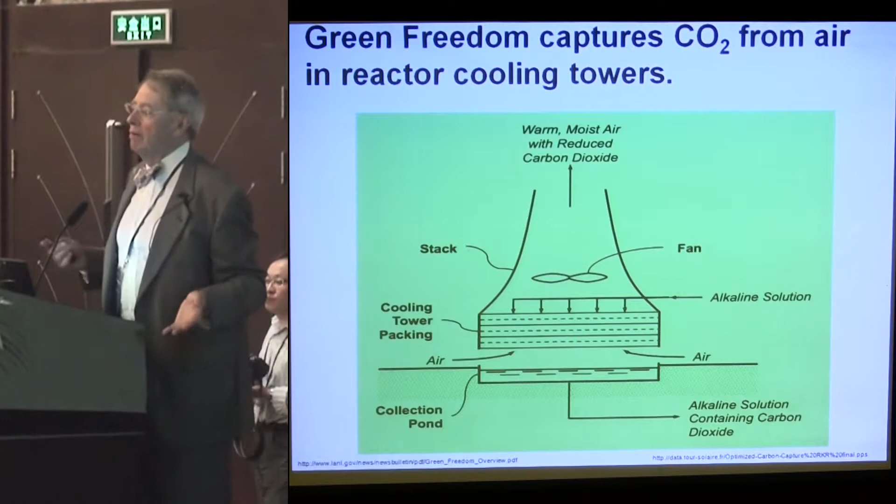A guy named Jim Holm, at the thoriumapplications.com website, has another scheme using the cooling canals of a nuclear power plant, such as the one in Florida, to do the same kind of thing. So that's a potential way to do that.

Of course, we can also get carbon from agriculture. Farming produces about 3 tons of dry biomass per acre per year, no matter whether it's switchgrass, corn, or trees, and about half of that is carbon. But let's not burn it—let's not do what the ethanol people do. Let's use the carbon in it as the carbon that's going to go into one of those hydrocarbon fuels.

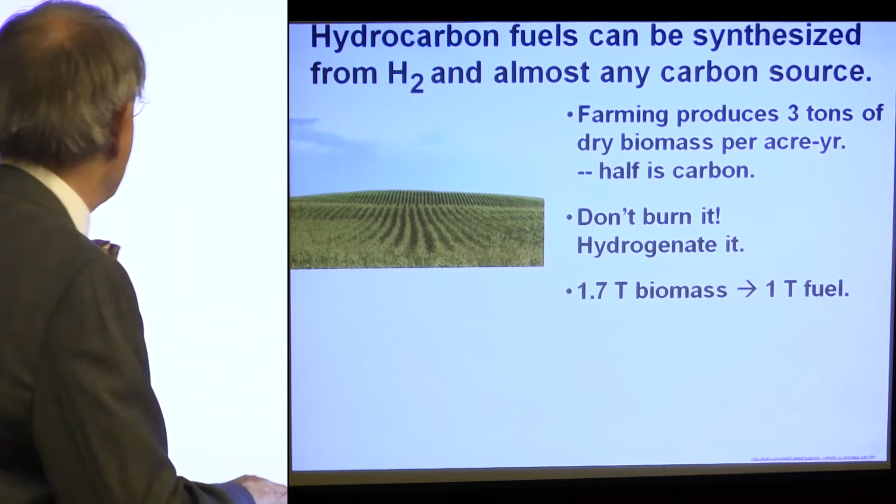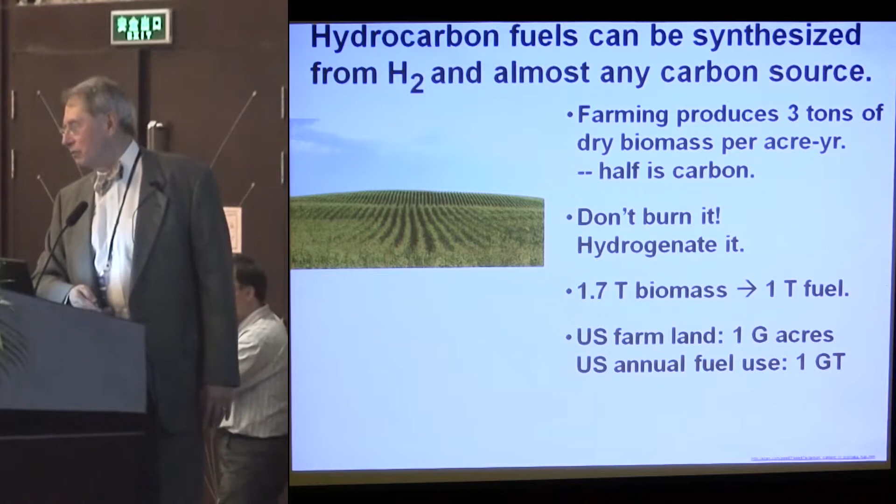We'll add hydrogen to it in order to create the fuels. We'll get about a 3-to-1 fuel improvement ratio doing that—about 1.7 tons of biomass would yield a ton of fuel. U.S. farmland is about 1 billion acres, and we already use about 1 billion tons of fuel a year. We'd have to reduce that a lot in order to satisfy our fuel appetite in the U.S.

But on the other hand, if we didn't burn coal, we wouldn't have so much diesel fuel burned in trains. Half of the train traffic in the United States is hauling coal to power plants. We can electrify the rest of the railroads—we can do better, so we might be able to live with that source. Cattle dung is burned in a lot of countries for fuel, but it's a source of carbon too. World cattle dung is about 2.5 gigatons per year—that could make a lot of fuel if we could collect it and hydrogenate it. So there are other sources of waste hydrocarbons we can consider as sources to make carbonaceous fuels.

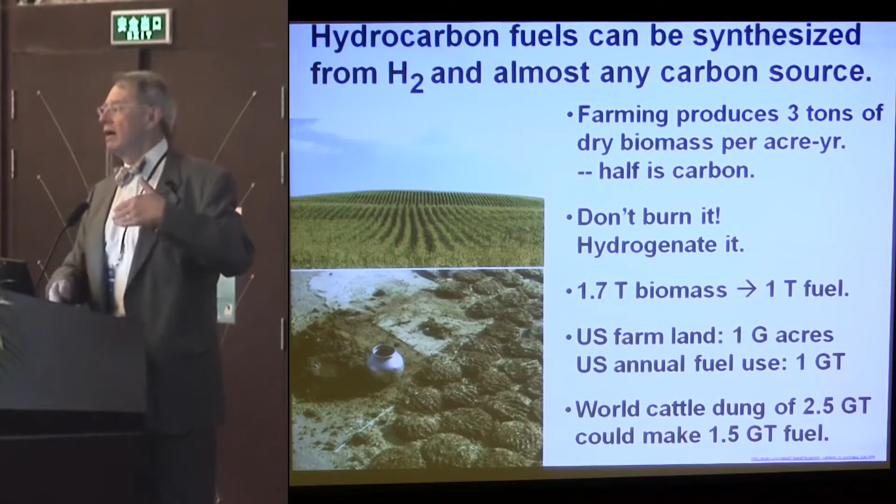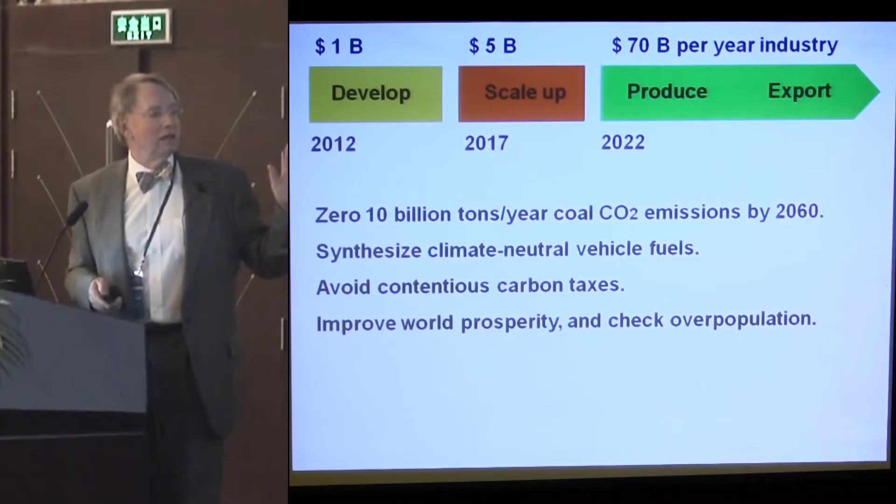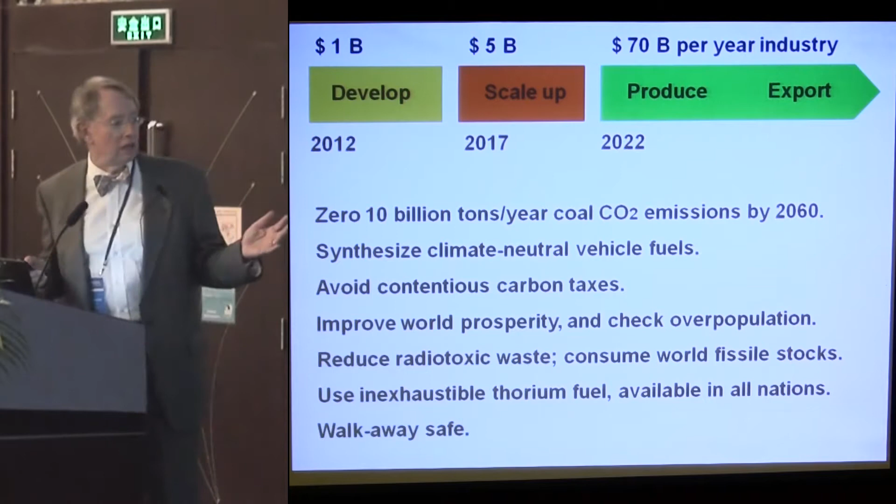In summary, I say: try and develop this technology. I advocate public domain ownership of the R&D for the first 5 years. Produce and export it. Zero out coal plant CO2 emissions. Synthesize climate-neutral fuels. Avoid the contentious carbon taxes that mean meetings such as Durban never succeed. Improve world prosperity by raising people out of energy poverty, and thereby check overpopulation growth. Reduce the radiotoxic waste from existing sources, and use the world's fissile stocks of excess weapons-grade plutonium and U-235 to help start up these reactors. Use inexhaustible thorium fuel, available in all nations, giving energy security, and create a walk-away safe reactor. Again, cost is the important thing.

We need to have energy cheaper than coal. The designers of that reactor are probably in this room. So I ask of you to remember there's a tipping point here. If you have energy cheaper than coal, we can solve that world climate and population problem because it will be in the economic self-interest of 250 nations to buy those cheaper power sources rather than burning coal. If we don't make that, and people find that they want to continue burning coal, then we'll have the scenario that was outlined by Dennis Meadows and the Club of Rome.

Thank you, Robert. This is Bob Cywinski from the University of Huddersfield. Unless I missed it in your talk, you didn't give a comparison of the cost of electricity from a molten salt reactor with that of conventional nuclear, nor a comparison with the cost of using thorium, for example, in more conventional nuclear reactors. I just wondered if you could comment on that.

We know the capital cost of a conventional reactor is about $5 per watt today, and the cost of fuel is trivial. So a typical uranium reactor today is competitive with coal, hydro, and natural gas, at about 5 or 6 cents a kilowatt hour. So it is a valid and reasonable source of power today.

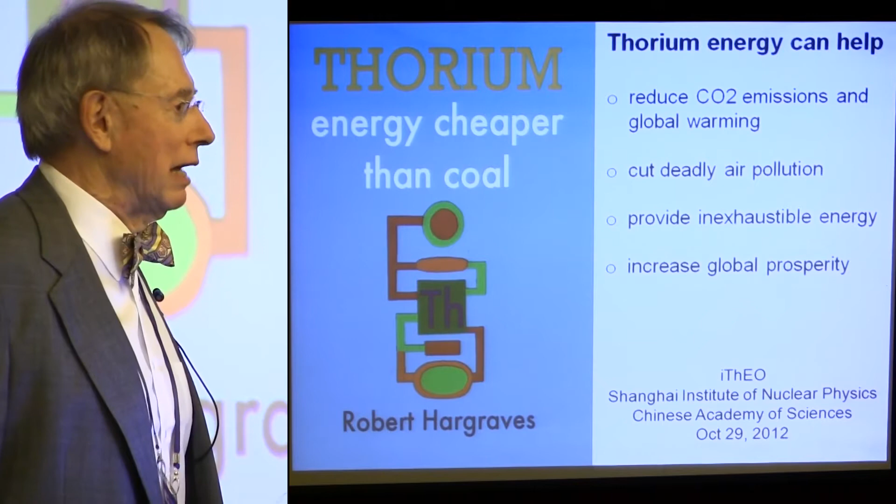The best I could do was to find those examples I showed you. I don't think we can get a really good cost estimate until we have a really good design, to be honest. I think, however, that the single fluid reactor is bound to be a lot less expensive, and it's probably going to be the first to market.

That was a fascinating talk. It's Bryony here at the front. I would just say, though, that I think the second half of your presentation gave me great hope and was really fascinating. The first half, where you talk about the costs of renewables, I don't see this as a competition between renewables and nuclear. I think they can be complementary and work together. And the reason we're paying a high cost per kilowatt hour at the moment is because we want to exactly do what you've suggested and have that learning curve development. More deployment, costs come down, and you find different ways of integrating it into the grid. So I just would say, let's try and create a big tent here. Let's try and work together. All low carbon sources should work together, and we've got to beat coal. I think the future for renewables is very bright, and some of my question, I suppose, is, what do you think about the integration of intermittent sources of renewable energy with storage systems such as heat stores, thermal stores being used in homes and businesses, which is what they're doing in Denmark now?

We should allow renewables to try to compete in this market, but we shouldn't hide from the public the true cost of what's being paid. So in the long run, we need to cut down the subsidies, particularly for ongoing production costs of electricity. The holy grail for renewables is to be able to store the electric power one day and use it the next. And it's very expensive. The only practical ways, and they're not very practical, that I've seen that work at all, are pumped hydro and underground compressed air storage. But both of these lose some energy. The costs of batteries for storing basically move the decimal point over one when you're trying to look at the cost of electric power. Arrays of windmills can sometimes back each other up because when the wind lulls in one place, it may peak in another.